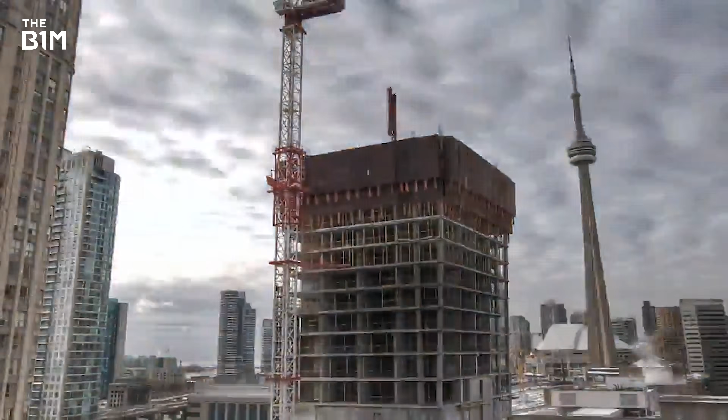Well, perhaps unsurprisingly, it all centres on Toronto's rapid development. Thanks to its position in North America as a hub for business, Toronto has experienced multiple office building booms, particularly in the 20th century. The skyline has completely transformed as downtown densified in a bid to support the rapidly expanding workforce welcomed in from all over the world.

In fact, until recently, Toronto had the fastest growing population on the continent. But as the workforce grew, so too did the need for homes. And as is often the case with housing, supply struggled to keep up with demand.

A huge number of those working in the city ran for the suburbs as a solution, which now sprawls for miles. But that caused its own issue. The suburban dwellers still had to get into the city for work. Commute times became hellish as infrastructure investment lagged behind demand. And that left people with only one option: their cars.

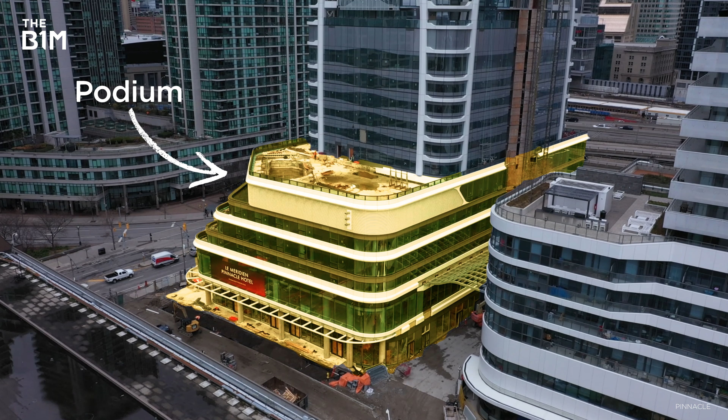Now, while I carry on fantasizing about my dream office space, here is what Toronto's new Pinnacle SkyTower is actually going to look like. The 352-metre Pinnacle SkyTower is balanced on a podium, a sturdy grounding for Canada's tallest ever building. It means the tower itself actually starts around level 13.

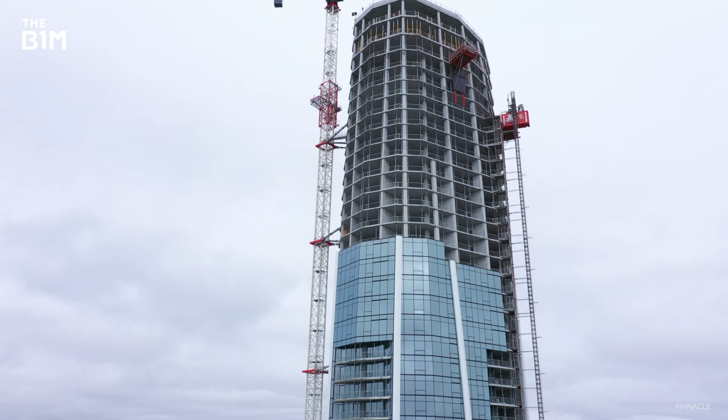As it climbs, it's centred around an incredibly robust reinforced concrete core supported by link beams and shear walls. The base initially features an almost rectangular footprint and then slims as it rises to become a 12-sided polygon. That serves two key purposes. First of all, it looks fantastic. If you're going to develop the tallest building in a city, then you kind of have an obligation to make it stunning. The second purpose is to tackle the intense wind pressures caused by Lake Ontario and the plethora of tall structures throughout downtown Toronto.

It's a little windy today in Toronto.

Because we have a dense core and we have a lot of buildings adjacent to each other, the modeling of that wind changes when more buildings are added, right? So this is something that's been coming up a bit in Toronto, where because the development is happening so fast, you may model your building for a certain wind condition, but then all of a sudden there's an approval for a building close by, and you may have to adjust your modeling to then suit those future conditions in the case that those buildings come up.

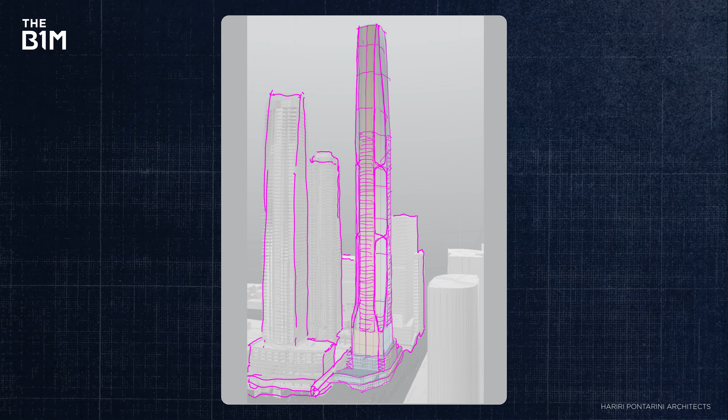SkyTower is just one of a number of skyscrapers being built in this city, and with 10 more supertalls currently proposed or under development, future-proofing is no easy task. In fact, this building has been so technical to develop that architects went through 70 different rounds of drawings just for the curtain wall system.

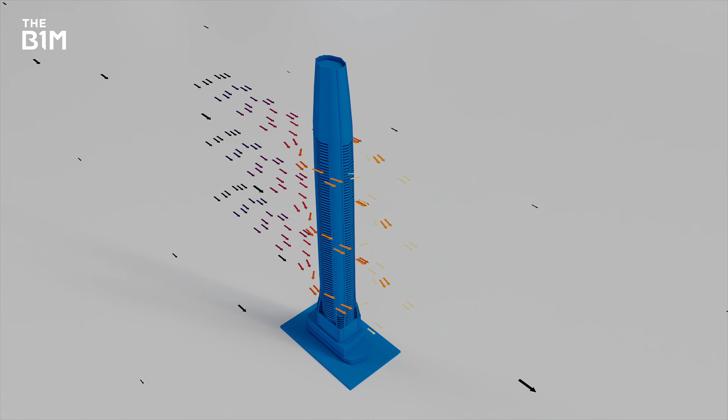Sharp edges tend to stop wind from gently flowing past, instead causing turbulent, swirling patterns. And so the design here sees 12 notched sides acting as a kind of giant diffuser for the wind. As powerful gusts hurtle towards the structure, they flow around the smooth edges to limit interference.

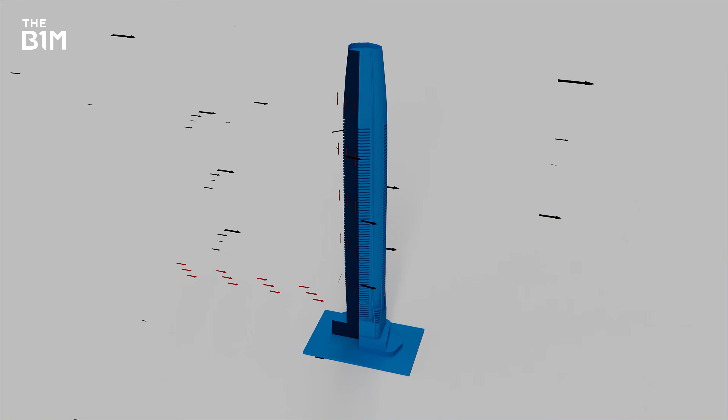Cutting the impact of the wind on the outside of the building is crucial, but it's not where the challenge ends. Thanks to the harsh, cold breeze that blows in off Lake Ontario, towers along the water's edge are battling what feels like minus 20-degree gusts, around minus 4 degrees Fahrenheit. As they hit the building, they get sucked up into the vertical shafts, haunting the interior by pushing and pulling at doors and windows. Architects and engineers had to painstakingly model every single door in SkyTower to check for wind pressures and make adjustments where needed.

One of the fixes was to divide the staircases into 4 quadrants or chunks. Each chunk, on the day-to-day, is isolated from the other, so you don't have a vertical shaft where wind can just carry up.

And then in a fire event, because all those doors have to open as part of our code, we had a pressure relief system where pressure sensors are installed in the stair. And if you get too high of pressures in the stair that affect doors at the top, then we have pressure relief corridors that would relieve that and balance that pressure.

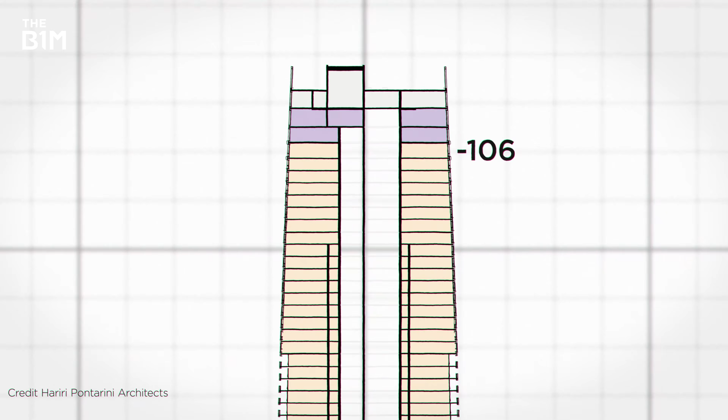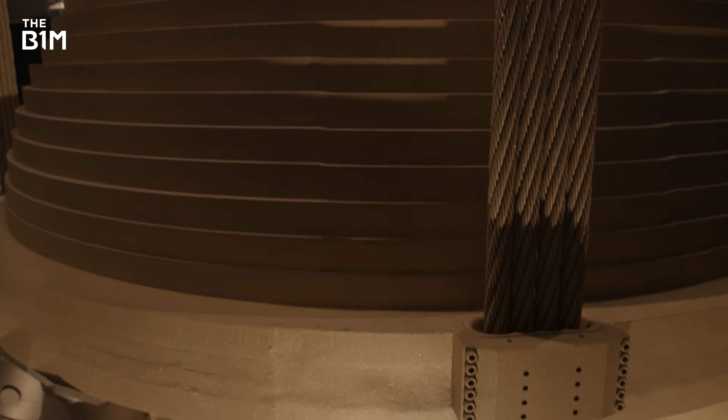Public and residential floors extend up to the 106th level, and then on 108 is a tuned mass damper stretching upwards by a whopping 9 metres. That's connected to a concrete slab that's half a metre deep, and it acts like a giant pendulum to counter the sway of the building, a bit like the one you see here.

It's an enormous piece of kit weighing 500 tonnes. Now, this TMD is so big that you can't just lift it up in one go. There's no crane strong enough to do that in this instance. So what has to happen is the TMD is broken into pieces and then over a series of months is lifted up and reassembled at the top of the building.

Now, as Nadine explained, working out the impacts of wind on a tower like this in Toronto is incredibly tricky. Development here is a constantly moving feast. Skyscrapers are going up left, right and centre, and a lot of them are going to climb to super tall proportions. But while that might impact the finished product, years into the construction process, SkyTower architects and engineers had to pivot to account for a monumental adaptation.

The footprint of the base is the size of the entire site, basically, which is typical for Toronto. We usually max out the site area below grade for parking and foundations. So the foundation was set by the size of the site and was set for a 95-story building. But then after the excavation had started and after the footings had sort of been established, the developer decided they wanted to go up another 10 floors.

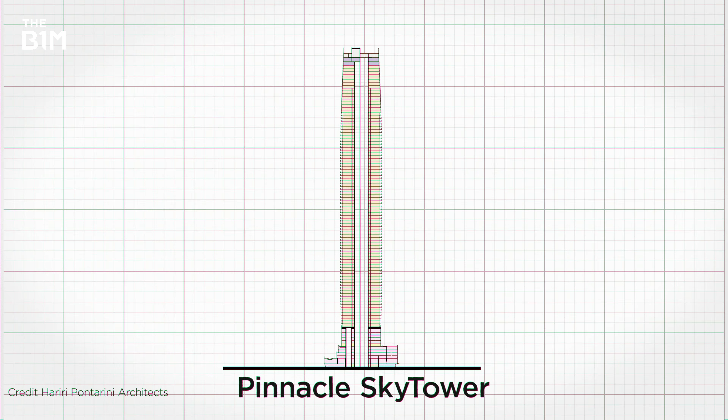Back in 2017, when approval was originally granted, SkyTower was set to be 40 metres shorter. But as the years rolled on and developments nearby grew ever taller, Pinnacle wanted to make sure their tower would really stand out, hence successfully gaining approval 2 years into construction to give their building a bit of a growth spurt. Now, it might sound simple, just stretch the plans up 40 metres and we're all good.

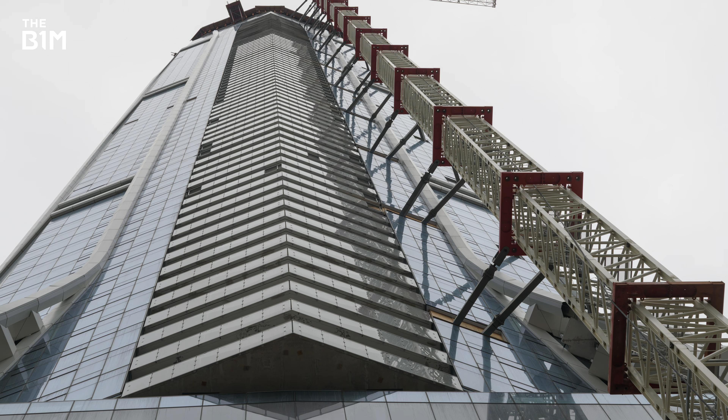But it's nothing like that. What we're talking about here is months of redesign work. For starters, to add extra floors to the building, the podium had to be widened above grade to spread the base and fix the adjusted slenderness ratio of the whole structure. This building is quite tall and limited by its base, so kind of widening out that podium as much as possible, yet treating it quite elegantly.

All of the corners are kind of curving and terracing upwards, so it transitions its way up to the sort of form of the tower. And then you've got these nice buttressed corners which sort of take that form back to its final location. The tower originally featured a tapering of the bottom 10 floors, but that had to be scrapped to keep it straight and support the extended base.

And while it might have been an exhausting process, the proof is in the pudding. SkyTower is the tallest building in Canada.

So I've explained a bit about the major housing crisis and the sprawling suburbs, but that doesn't really answer why Toronto has turned to supertalls now. The downtown core faces the same issues that all major urban areas come up against eventually, a lack of space. Although that doesn't mean all of its towers are full. The city is littered with underutilised office buildings and condos.

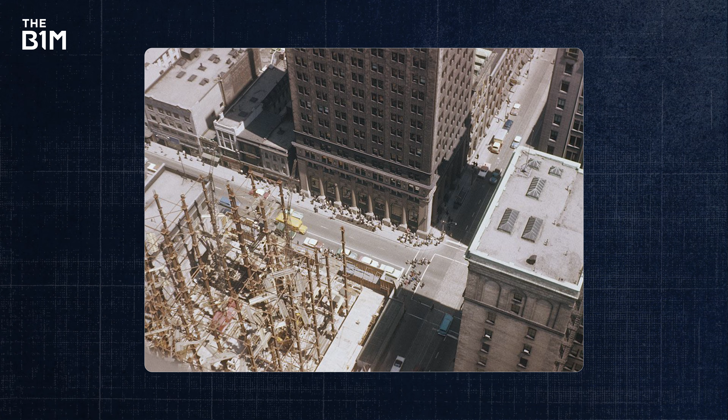Let's talk about those offices first of all. Throughout the 20th century, there were multiple office construction booms. As the city's population climbed, these great towers went up to offer commercial working space. Downtown is now full of office buildings. The problem is that following the pandemic, Canada introduced stricter immigration controls and its population is now declining. Compare that with the new work-from-home mentality, and as of last year, there was a 15% vacancy rate in downtown offices, compared to just 2.5% pre-pandemic.

Now, those office towers are getting old, and replacing them is pretty challenging. Existing city bylaws say that any demolished office buildings downtown have to be replaced with more offices. And while not impossible, overcoming that hurdle has historically been a bit of a minefield. And so, with the financial demand for office towers shrinking, these ageing structures are kind of just stuck there. Although the policy has now been relaxed after a review.

But what about those empty condos? Well, over the last decade, they've accounted for half of all new housing built in the city. The perfect concoction of low interest rates, a rising population, and rising property prices meant that investor demand went crazy.

Developers built condos left, right and center, knowing they could flog the units through pre-sales to investors. And investors were more than happy to oblige. They could buy up apartments at a cheaper rate before they went onto the market and then naturally increased in value. On average, between 2015 and 2022, units rose in price by more than 40% between when investors would buy them and when they'd sell them again.

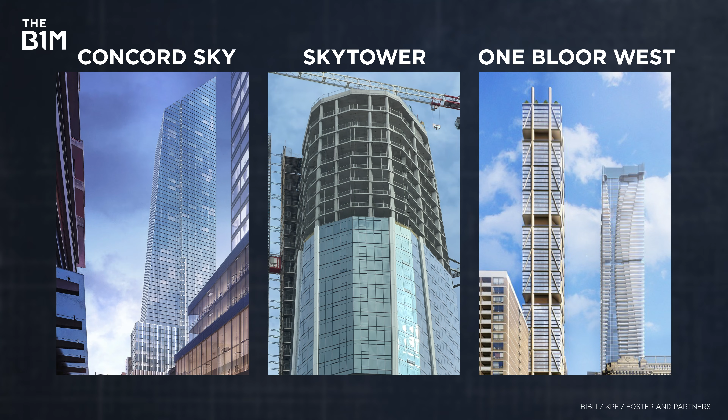This is proven by the fact that all three of the supertalls being built right now in this city feature multiple asset classes. We're talking offices, apartments, hotels, shops and restaurants. And to fit all of that into one building, you need a lot of space. Sometimes it's as simple as land on the ground is expensive and land in the sky is cheaper.

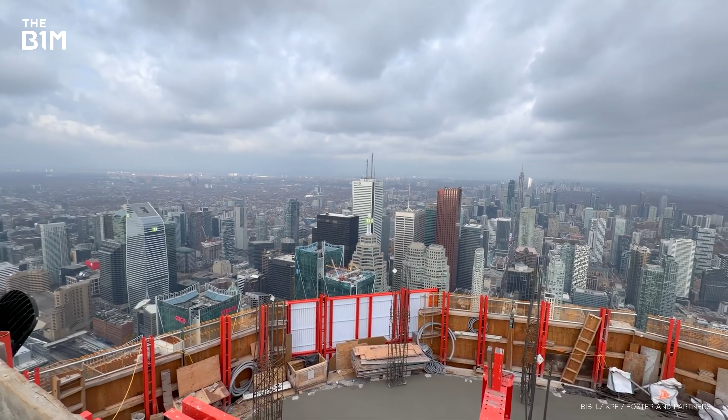Couple that with developers forever wanting their tower to be the tallest or flashiest in the city, and it's no surprise that Canada's started building skyscrapers over 300 meters tall. By next year, the SkyTower should be joined by Concord Sky, and then a year after that by One Bloor West, formerly known as The One.

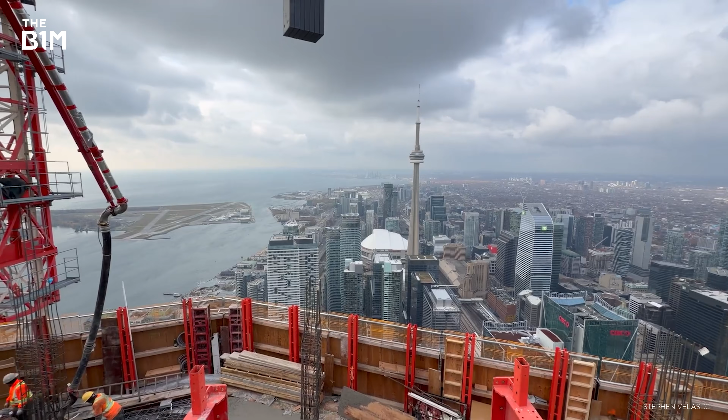Three supertall skyscrapers are navigating their way onto Toronto's skyline, and they could be joined by another 8 in the coming years. But as we've seen, successfully constructing a tower of this height is no mean feat. And while it's taken national population policy changes, global economic fluctuations, and even a pandemic, Toronto is now following a path laid by various other cities around the world.

What lies in wait for these towers once they're opened is all a part of the gamble. Whether they become economic successes that really add to the skyline, or glass boxes that just perpetuate the housing crisis, only time will tell. One thing is for certain: a precedent has been set for building supertall skyscrapers in Canada. And this is only the beginning.